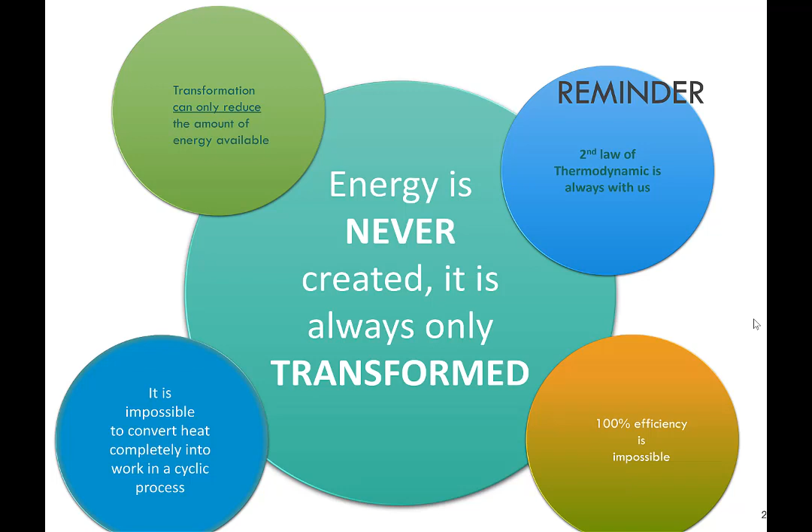100% efficiency is impossible, and in other words, it's impossible to convert heat completely into work in a cyclic process. You cannot do that forever. So keeping all these points in mind, we can move forward and talk about the resources. We'll get to know what type of resources we have access to.

And we'll probably provide a brief introduction to each one as we go. So forms of energy, we looked into this last week, and these are sort of forms which you expect and we are currently using and changing between one another. This was not covered last week: magnetic energy. Magnetic energy, in today's magnets, is really a storage. So you build a magnet, you store that energy in it, and then you can use it.

That brings us to trying to identify the types of resources available. And that brings us to two types, finite and renewable. So can you give some examples of finite? Fossil fuels, yeah, it is a good example of finite. How about renewable resources? So if we just try to look into these two, how they really differ. I know this probably already makes you think about quantity, and this is finite in quantity and this is renewable.

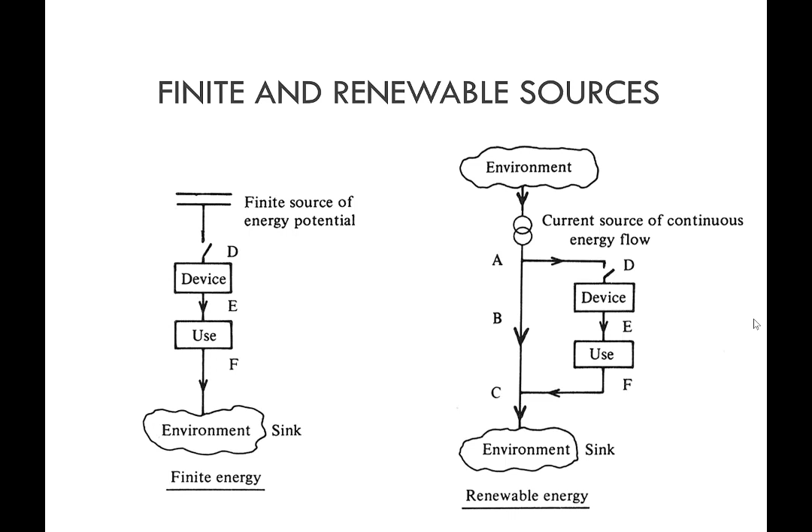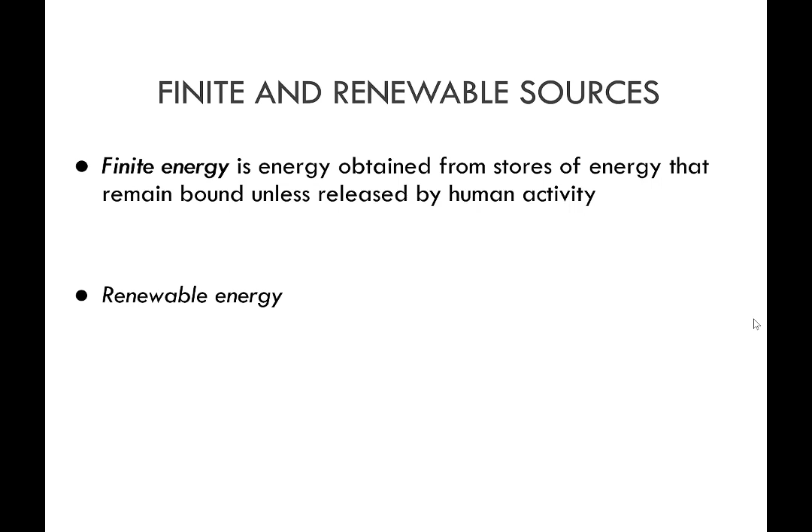Putting some definitions for these two. Finite energy is basically that energy which is obtained from stores of energy that remain bound unless released by human activity. Renewable, on the other hand, is obtained from naturally occurring currents. So these two things you need always to keep in mind when we talk finite or renewable: the stores for the finite, and the occurring currents for the renewables.

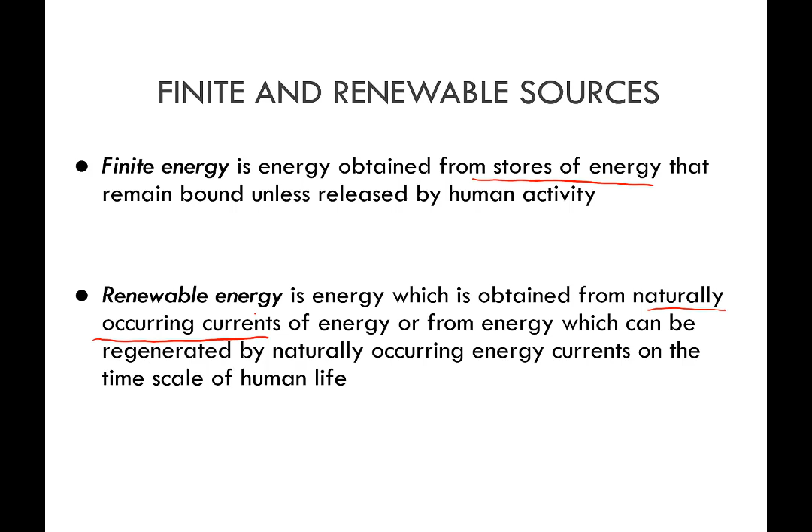Now, if we want to give examples for each one of these, we got the fuels, which you mentioned, and some examples for renewables as well: sunlight, wind, and earth heat, geothermal. Do you think there is anything missing from this list? Biofuel, or wood, or biomass. Where do you think it belongs to?

It is actually for both, something in the middle. It's something you can store and you can renew. But if you don't renew it, it will basically become finite, and you will harvest it, burn it, and that's it, it's over.

Doctor, yes please. What about hydrogen? Well, hydrogen, where is it coming from? Now, these sort of resources are already available for us, we are not making these. So the hydrogen which is there in the environment, which was basically released during the formation of Earth, it will fall in here. If it's something you are making with renewable technology, then that is different. You are using water, or getting hydrogen from somewhere else.

Now, if we just look into these and try to find the origin of all these resources, can you help me with that? Where do you think the origins came from? Sun, one of them, okay? And that is applied to sunlight and earth heat, which is the gradual cooling of Earth, basically, and wind. Come again? Wind. Well, if you think about wind, why do we have wind in the first place? Gravitational force, yes, but not for wind.

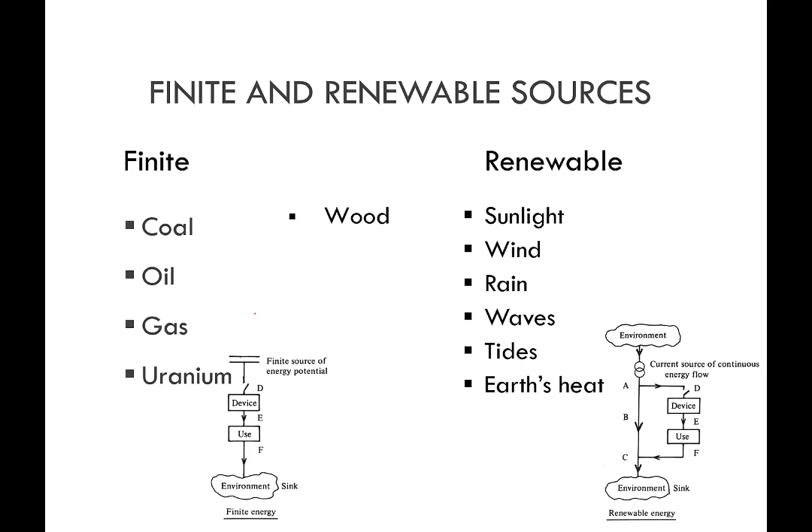Okay, so this brings us to the origin of resources, and we got only four. Energy released by the gradual cooling of Earth, and it's still being released as good currents which we can use. Energy stored during the formation of Earth, an example of that is uranium, for example. Energy provided by gravitational forces and the solar activity.

Now, if you look to this list, it doesn't really have what we have seen last week in all these figures with coal, gas, and oil, and everything increasing. So where do you think that fits? The fossil fuels, other than uranium. Where did they come from? It's millions of years of vegetation, which was due to the solar activity.

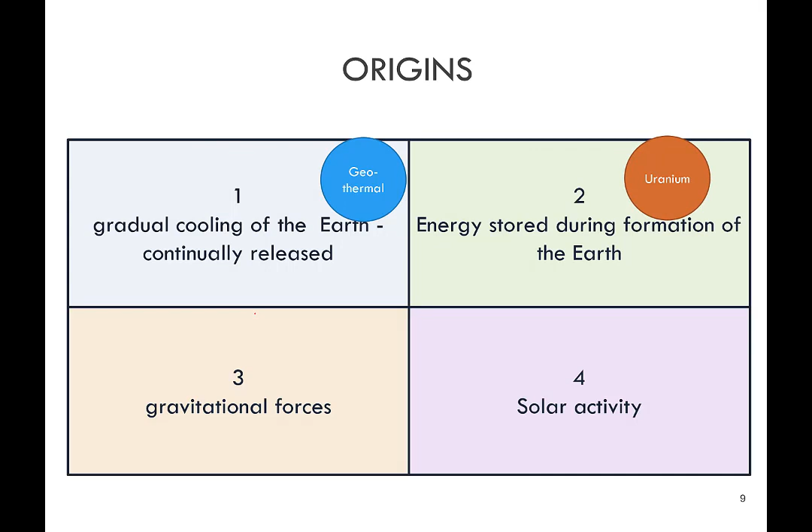So basically, almost all what we have now, other than of course the gradual cooling of Earth and gravitational forces, is lots of storage of solar energy on the planet. So oil, gas, all the coal, they are all basically from the sun. It's stored energy which we are now accessing on a daily basis. So let's try to divide these origins the same way, the four, and we'll just give an example to each one of them. And then you get a long list that goes with solar activity.

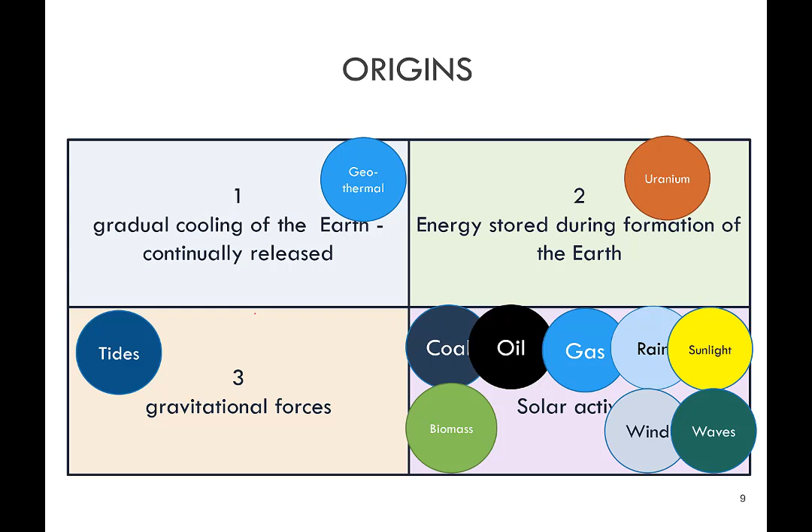Okay, so the ultimate resource is solar, and this all is being stored and we use it. Now let's try to put some numbers to all that.

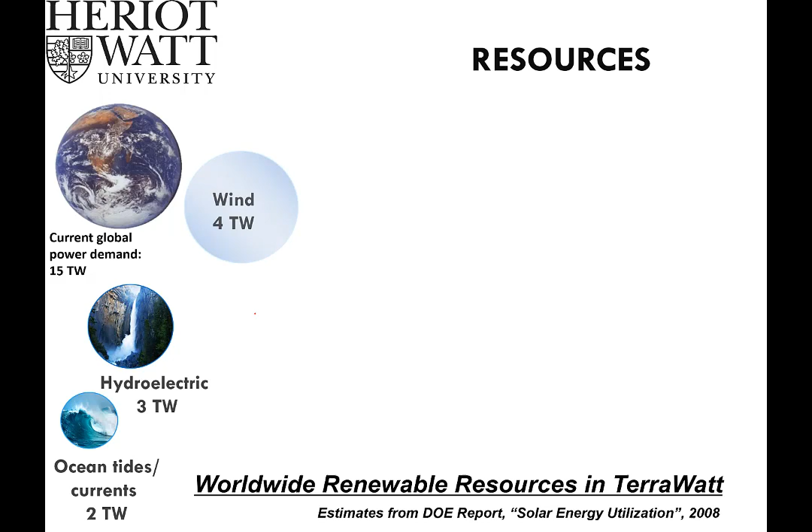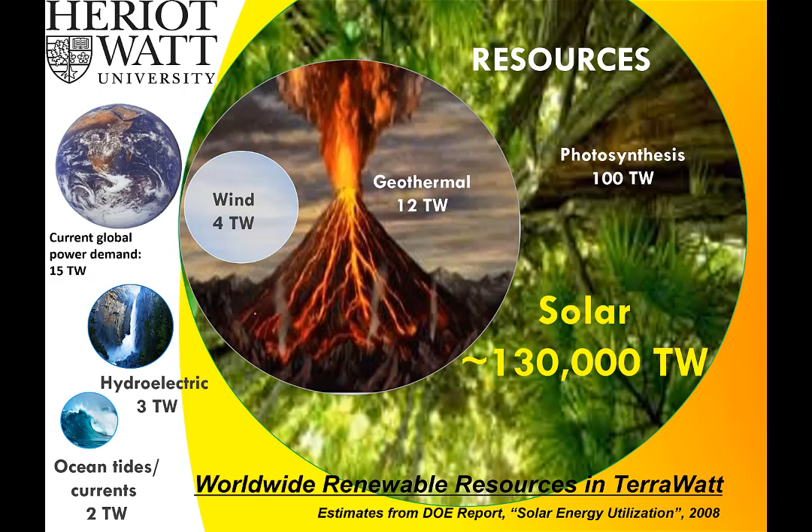Resources available in terawatts: the total required is about 15 terawatts. We get ocean tides about 2, hydroelectric about 3 terawatts, wind 4 terawatts, geothermal 12. If you add up all these together, other than solar, they barely add up to what the planet needs. This highlights how much solar energy we are getting and how much we can satisfy of the planet's requirements if we can tap into that solar energy.

So we get solar global radiation. This is on top of the atmosphere. Before the solar radiation enters the atmosphere, we get about 1,360 watts per meter square. Some reference books might give it as 1,363. So this is going to be a sort of golden number. We'll see how we'll convert that to expected solar radiation per area.

Now we get that on top of the atmosphere as long as the sun is shining. On the ground level, cloud coverage, angles, and all these come into place to estimate how much you get.

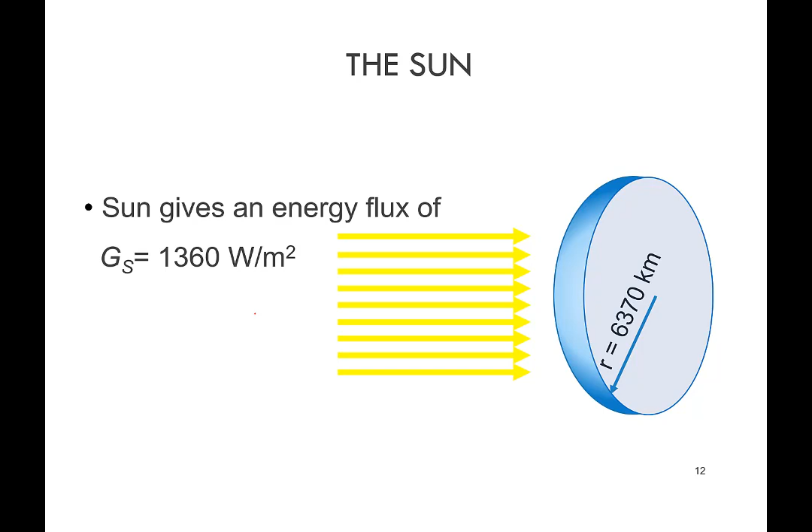So now if we want to know - this is per square meter by the way - how much we are getting to the surface, which area do you think we should take? A disk area, pi r squared, a sphere area, or half a sphere?

Half a sphere? Anybody, let's start with A. Anybody says A, disk? Okay, B, anyone, a sphere? Zero, which is good. Half a sphere, everybody else? Some people not raising their hand either way. Do you think there's another way to do it?

Anyway, so the correct answer is A, and I will tell you why. Because if you look into the sun, which is really far and really big, all this solar radiation looking from our small planet will look something like that. The sphere which you guys are talking about is here, but if you look at this energy, it's basically that disk area here. And then this will come and distribute to half of the sphere, and the rest will go and hit other objects. So are we cool with the disk area? Because we'll confuse you a bit next - we'll use half the sphere for something else. But I promise the disk is the correct answer.

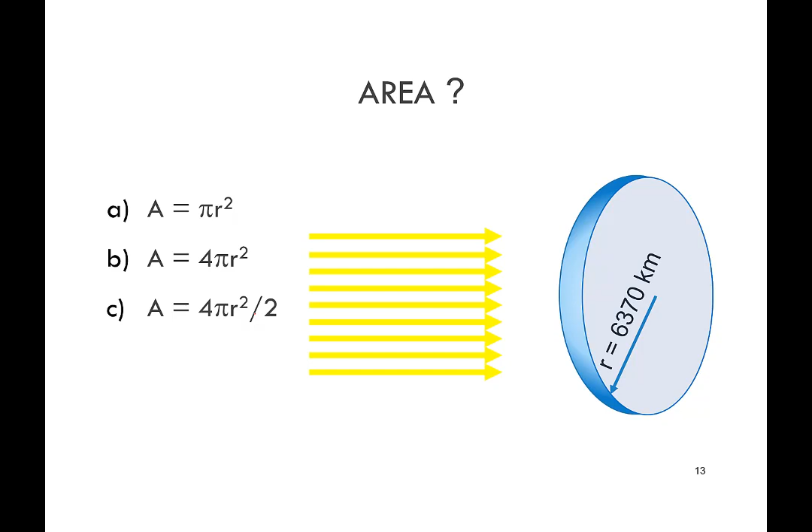So we are going to multiply that with the area. We need R, we have R - again, it's an estimated R, it's not a perfect disk or a perfect sphere, but we'll live with that, and we will use this radius in this case. That will get us to this figure, a total energy of 174 petawatts.

We have seen this last week as well, and we have also seen the 10,000 figure. So we get lots of energy from the sun, but we'll need to tap into it, use it, and it will satisfy a good amount of our energy requirements.

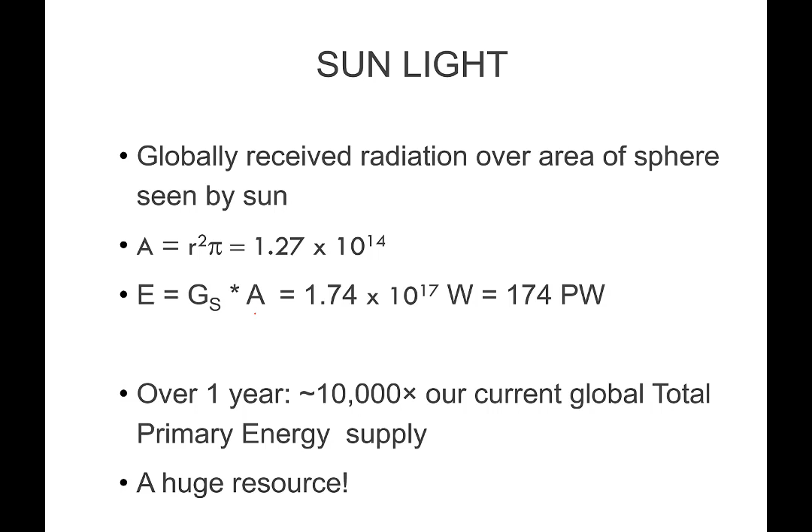Now, talking about radiation or light in general, we will see the spectrum of the solar radiation, and we know it has some other components other than the visible light. But most of it is actually in that visible light, plus a little bit of the UV and a little bit of the IR.

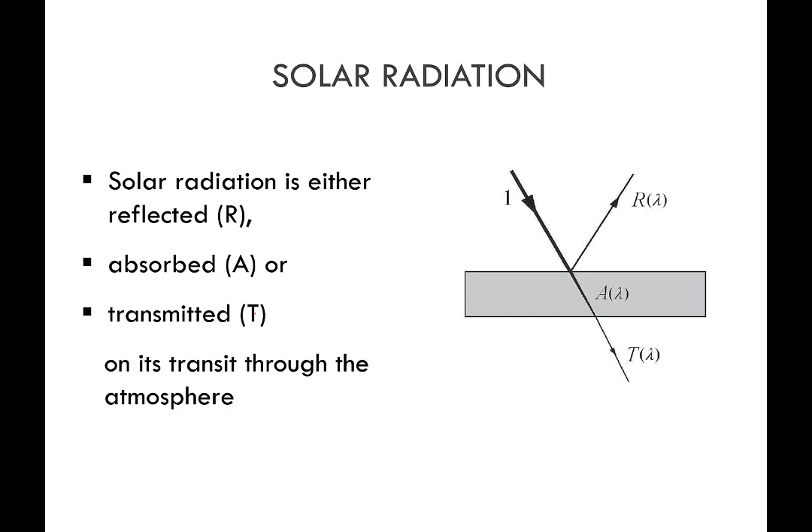So talking about light, physics 101, you will get the light either reflected, absorbed, or transmitted. You don't have any fourth component. So we will see how this will apply to our solar radiation.

The energy balance looks like that. So you get about 100% in, 70% direct reach to Earth, plus 7% scattered to Earth. We are interested in these - all your solar collectors are working on these, if they are at ground level. If you are building a solar collector up in orbit, then you will get the 100%, and then you don't need to worry about any sort of coverage. You don't need to worry about cleaning as well, unless an old satellite hits your setup.

Okay, so we get absorbed about here, and that is the ozone, and then there's the dust layer, the water, and so on. But what we are interested in really are these two figures, 70 plus 7. In general, moving from 100% of 1,360, we assume about 1,000 watts per meter square reaching the surface on a good day. And of course, that will be subject to angles, and we will see that.

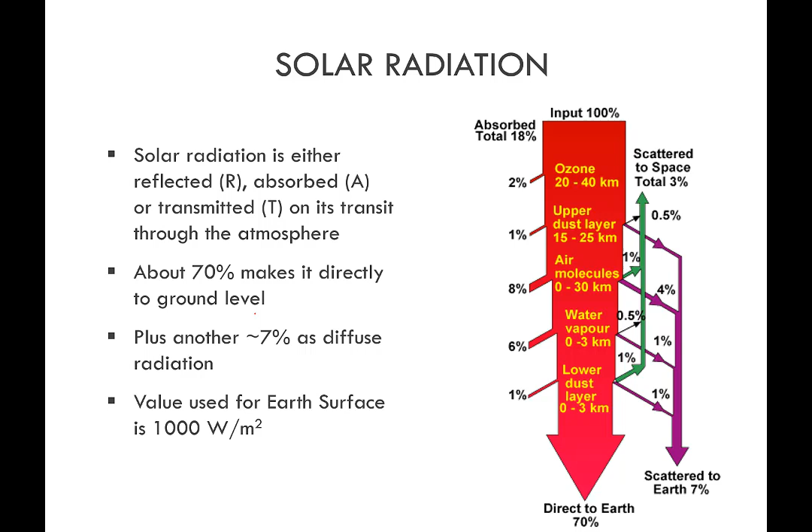So that brings us to another term, air mass. How many of you are familiar with air mass? No? Okay, so air mass basically is how much mass of air the light needs to go through to reach your solar collector, to hit the ground.

Air mass 0 here means there is no mass at all, and that's where the figure 1360 comes from. If you need to move in, you need to calculate the air mass. Air mass 1 is very easy, it's the shortest distance the light needs to travel through.

Air mass is a number which feeds into your solar energy calculations. It refers to how much air mass the light needs to pass through until it reaches your collector, measured based on the atmosphere the light needs to travel in. Outside the atmosphere, at this point, this is AM0, air mass 0 - there's no air, we haven't gotten into air yet. If you get to the shortest distance to hit your solar collector, then that is air mass 1. So zero and one, everybody clear on that? Then we can move to others.

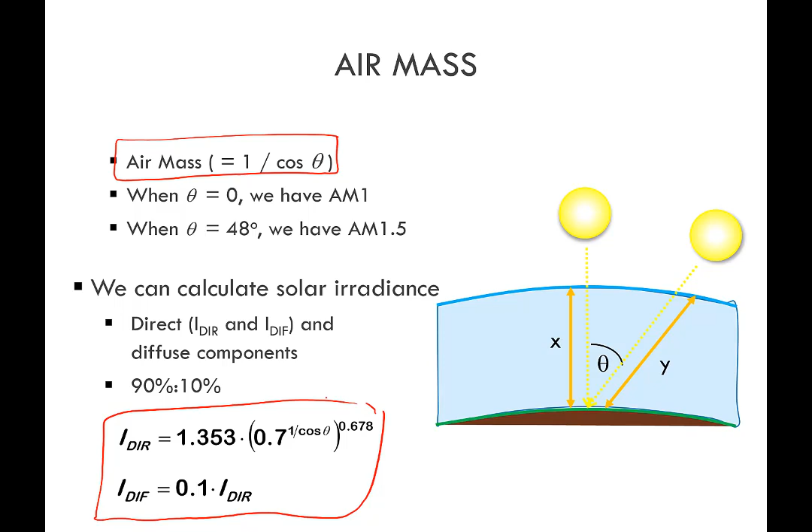Okay, some more on solar radiation. This is a typical spectrum of solar radiation at AM0. So if I want to put AM 1.5 on top of that, do you think it's going to be lower or higher? Lower, because there should be some losses.

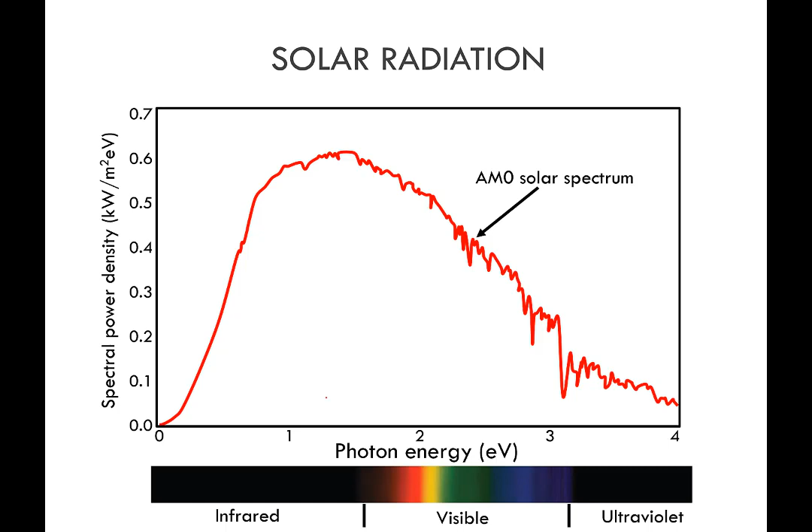Do you think it's going to be identical to this, just running below it, or will it have a different shape? Different shape - why? Because infrared, visible light and ultraviolet behave differently in the day. Ozone, because of the wavelengths - it gets lower because of the wavelength. Everywhere? So it will look the same? No, at the end of the day - infrared will be the longest wavelength, which has the least power.

Anyway, let's see it - it looks something like that, sort of expected lower in most of it, but then we've got these areas. This area means that photon energy at this level is totally blocked, or if we remember our physics basics, it should be absorbed somewhere, so it's not reaching AM 1.5. That's a place, let's say Seattle, for example, at 48 degrees - so in Seattle you get nothing when the photon energy is here, lots of absorption there. This is sort of expected, right? We thought it would be lower anyway due to dust and other things - UV, the ozone layer is helping us a lot. So what do you think is causing these spikes here?

Clouds. Why here? Because of the clouds, maybe over there. So why only these specific points? If the cloud should cover really all of it, it will be much smaller, right? If you think it's shading. Maybe.

And that's why the efficiency of solar panels is in the range of 20s for single junction. Recent years bring research of having two junctions. How about I have... I think I can do some good sketch, hopefully. It's not part of your class. So what's happening these days? You get basically a junction which can absorb red, let's say.

Now these colors are really just examples. It works at 20%, but it's built in a way that lets other wavelengths pass through. So you can put your second junction under, which absorbs green. And then I think the best you can do at the moment is 3 layers. So if you imagine 20% each, you can get up to 60 looking into 1 square meter. Of course, you don't get 20 from each after putting them on top of each other. 45 is typical for multi-junction nowadays in the market.

So this is a solution for the spectrum. If we can find another solution which will make these solar cells work on a wider spectrum, then we can increase the efficiency of solar cells by many folds. One more line: this is the black body radiation at the temperature of the sun, and you can see it goes really nice over the spectrum. That's where we got the theory of the sun's construction and how it emits energy and light.

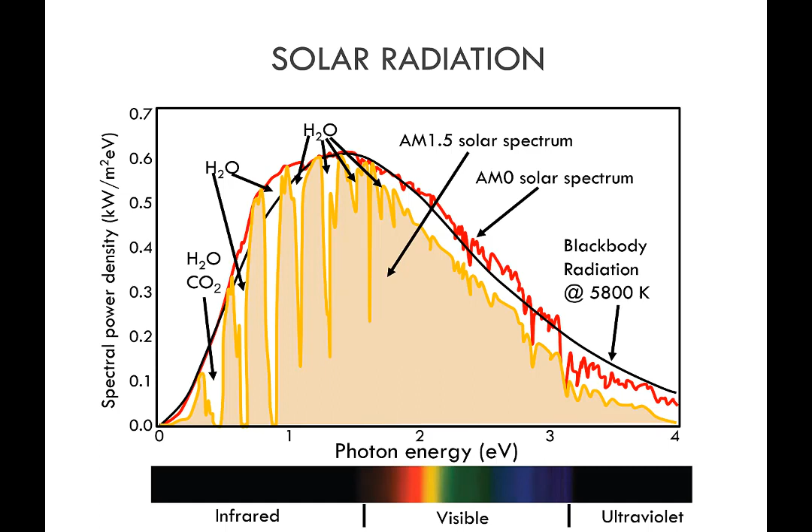So photovoltaic, which is what we are really after, has a typical efficiency of about 20. You get it out in the heat with the dust and the soiling effect, you get it much lower. You can do concentrated, but you need cooling. There are many ways to harvest that. This is again a typical figure, so it depends on material, temperature, and of course where you are fixing it.

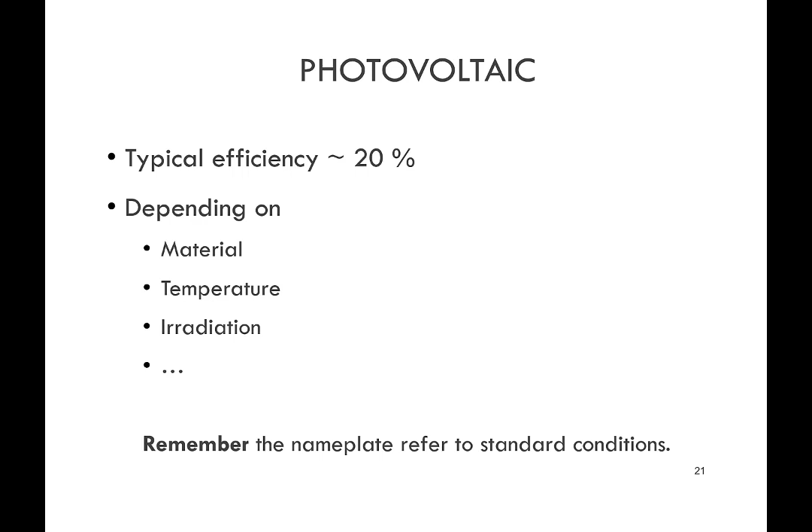Very important thing if you are going to be in this field: the nameplate always refers to standard condition. If it says 200 watts at standard test condition, that is 25C, unless it's mentioned something else, and 1000. The panel normally has a label on it for cell temperature, not ambient temperature. So it's equivalent, I guess, to 15 degrees Celsius ambient temperature, it really depends, but you need the cell to be that. And this is 1000 watts per meter square.

So if you get less than that, you get less. Temperature is, especially if we talk about the Gulf region, most of the cases more than 25, especially when you have good solar radiation. Maybe winter, and of course in the night. What about the air mass? Air mass is, I'm talking about the nameplate, some of them will also mention that: 1.5. But again, when you install it somewhere else, you need to consider the conversion from that.

Perfect. Anything on solar energy before we move forward? Anybody work in the solar energy field? Anything to add, some tips, tricks? Nothing? Good.

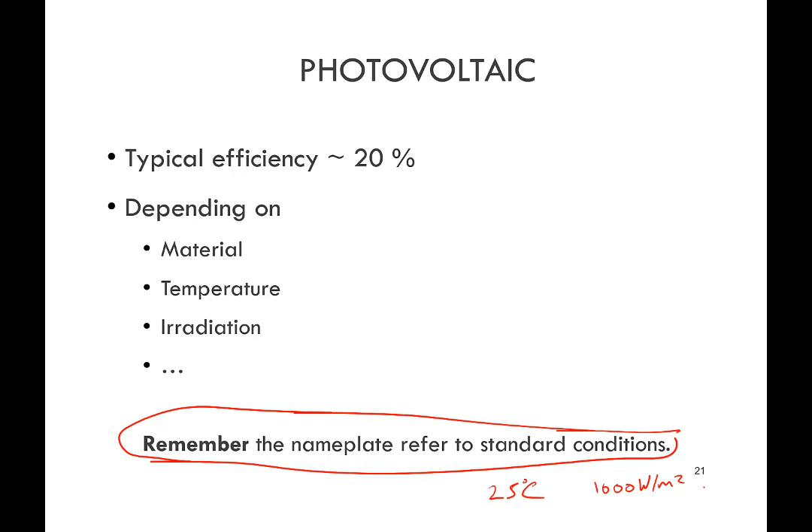That will take us to another resource related to our renewable resources, and later we'll come to fuels: wind energy. Now, wind energy, today I'm not going to really touch on it because you have a full lecture on fluid mechanics, and that will cover wind turbines as a basic. If you are a mechanical engineer, you should be really familiar with that. Other engineers must have seen it somewhere.

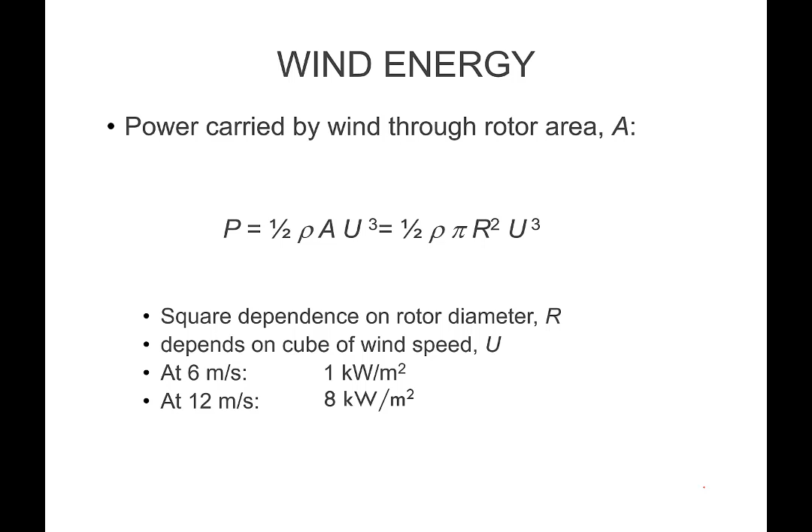Now, if we just want to draw this with respect to wind speed, we get a curve which looks like that. So, wind starts blowing, and then your energy will increase. It will double, triple, and then your energy will boom up. But any of you have seen a power curve from a wind turbine? Does it look like that? No, it doesn't look like that. Why?

Cut off. So what should I add to make it look like one? You mean it will stop? There should be a cut in, cut off, right? Cut in and cut off. Well, this is basically sort of cut in, there is nothing when the speed is low. But then you're mentioning cut off at high speed. How about the shape of it? Constant at a particular speed. Yes, exactly.

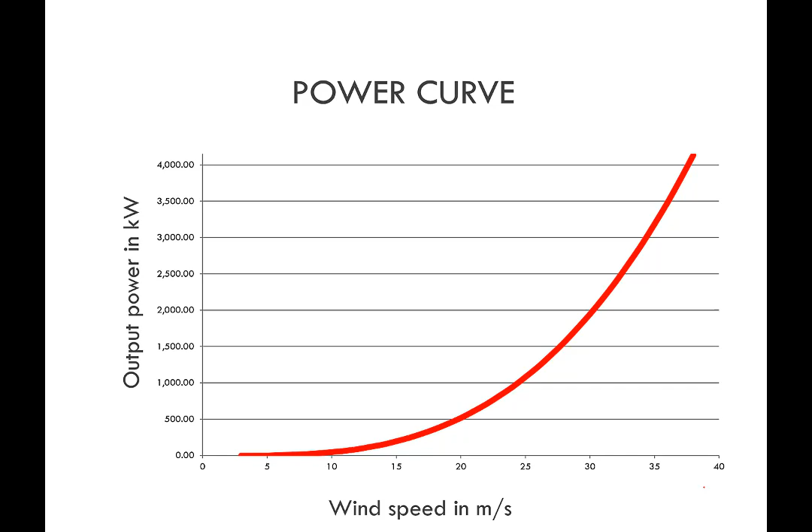So this doesn't happen in reality for one main reason, which is the generator. If you turn it faster, it doesn't matter anymore, it will reach its saturation for generating electricity. So you run it at rated speed, you get what you get. And that's why there is a rated speed at 10 or 12. If you run it faster, it doesn't really matter. Then the wind can blow even much faster, it will reach a dangerous level for your turbine, and you will decide to shut it down.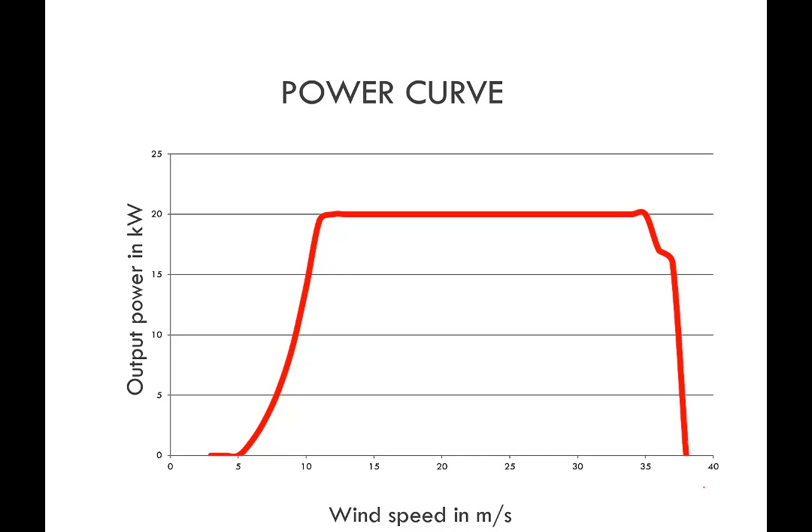Now the blades themselves, they move. So as the speed increases little by little, the blades will adjust their direction to reduce the speed and bring it to the rated speed. But it will reach a point where it cannot, then it will basically cut off. Which is sad, you have lots of wind, but you can't use it. Again, this is a field which is ongoing research. Years ago, the blades were not moving. Now we have moving blades, and we also have very intelligent systems to protect these wind turbines, because the investment is very high when you put a wind turbine in any farm.

So is there any specific reason that in Germany they are putting the wind turbines into the sea? Well, there are many good reasons for that. First of all, the wind flow, it's open space, so you can imagine the wind speed and flow, you can easily predict it, and it can continuously go. But is it again going to be more dangerous because of the sea, the high waves? Well, here your measures will come in, so it depends on your data from that specific area. You will decide which type of wind turbine and which sort of technology you put for protection. But what you need with wind is as much continuous wind as possible, so there is no curve change in the sea over time. And technically, you calculate the power the same way. In the sea, you have lots of area, so you don't want to worry about land.

You get lots of wind in open land, so you don't need to worry about buildings blocking it. You can also develop the country - what is now desert or mountains may in 20, 30, 50 years become built-up area. People often don't like wind turbines for various reasons, especially in Europe where there's lots of opposition. Offshore in the sea, at least they don't see them.

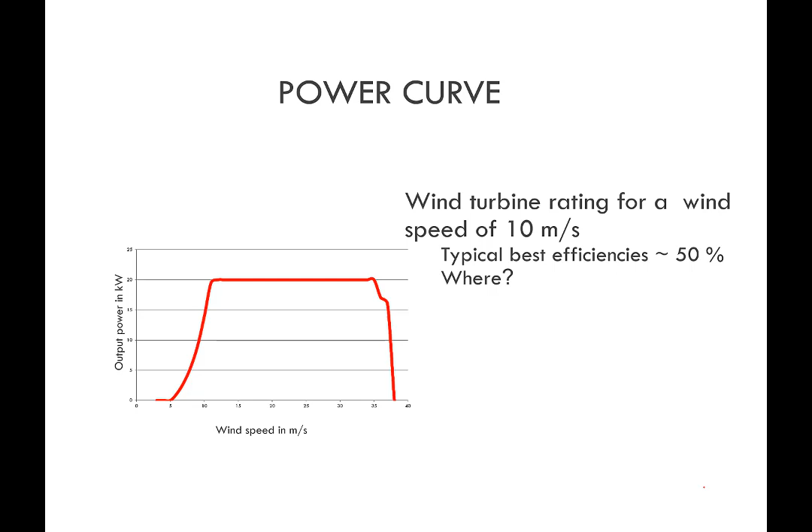Wind turbine rating for a wind speed of 10 meters per second - typical efficiency is 50%. When we talk about wind turbines, where is this 50% on the graph? The rated RPM - at the rated RPM, just when it started, this is the best efficiency. Why? Because as you move further, you're getting more energy but the same output, so your efficiency is really dropping as you go. So it's really at the rated point, and that is the best point to operate.

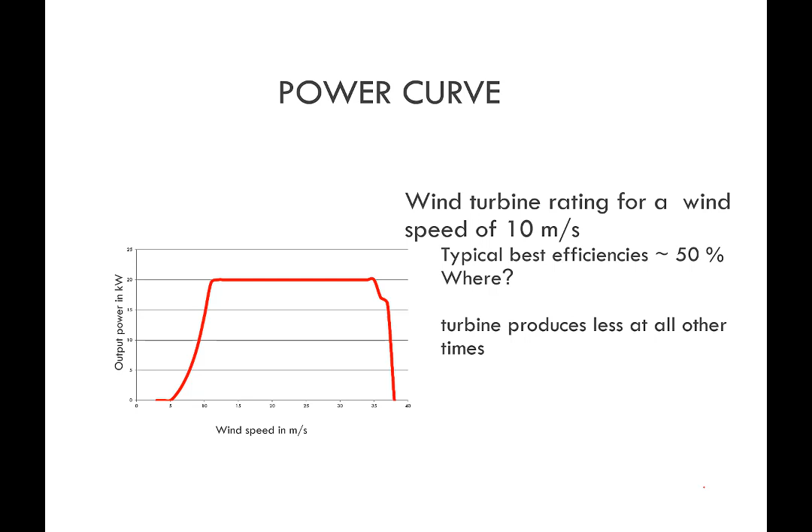The turbine produces less at all other times. Now, when we talk about wind energy, there are always limits - Betz's limit in this case is the maximum you can achieve, which is 60%. If you make an ideal wind turbine, you get 60% energy harvesting out of it. Similarly, in thermodynamics there's the Carnot cycle - you cannot exceed that, similar to what we've seen in this graph. There's also a rated RPM for the generator; it doesn't matter what you do after that. So there are always limits, and these are things to keep in mind for wind energy.

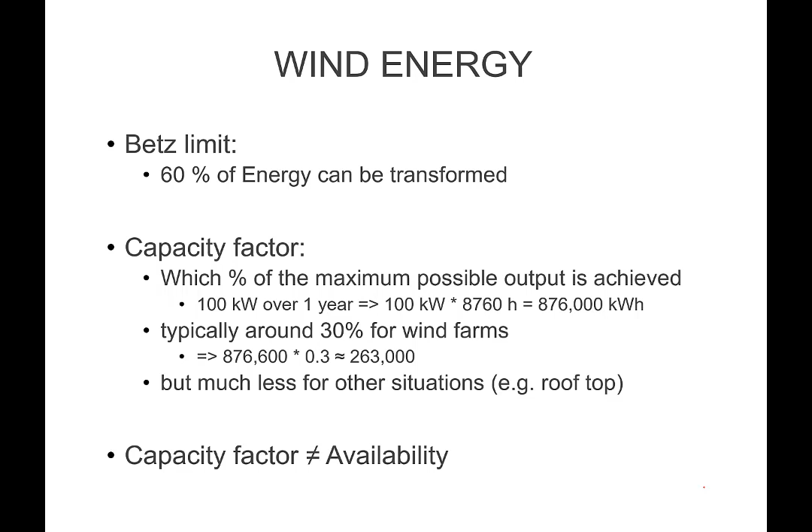Capacity factor is something you've seen last week, and then that will let us move forward.

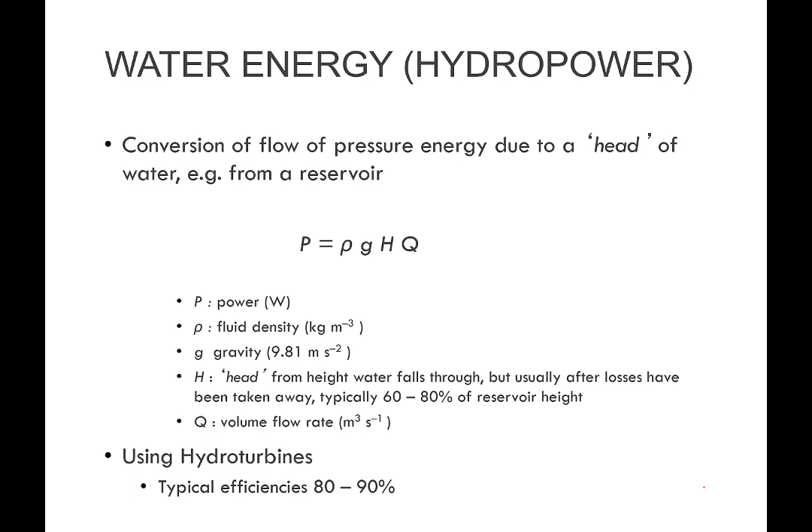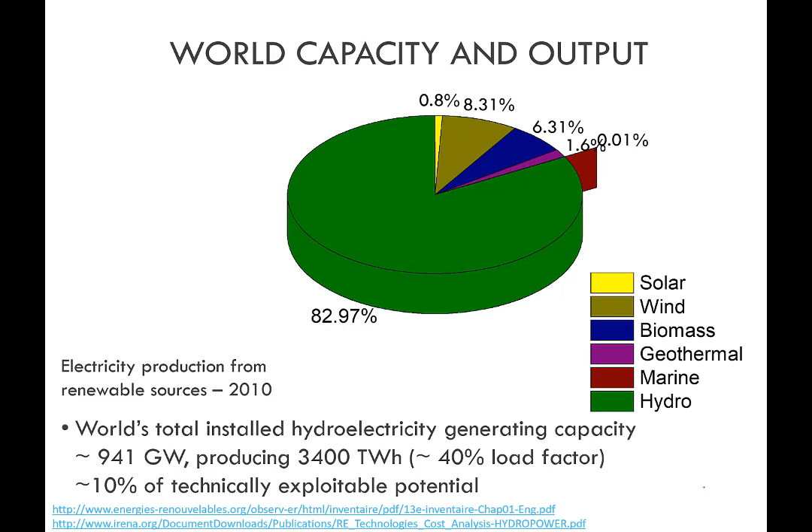So anything on renewables? No? Yes, please - regarding geothermal. I heard about some projects where, for example, if you drill to a certain depth and it heats up the water, you can use it. Where - in Dubai or UAE, or somewhere else in general?

If you want to harvest or work with geothermal, it can work both ways. For example, in Dubai and UAE, if you just get to the water level, the water is normally at a fixed temperature, so you can use it to dissipate heat and use a heat pump to cool things. But if you want lots of heat, that's something you cannot do everywhere - there are certain places like Iceland, for example, where that's possible.

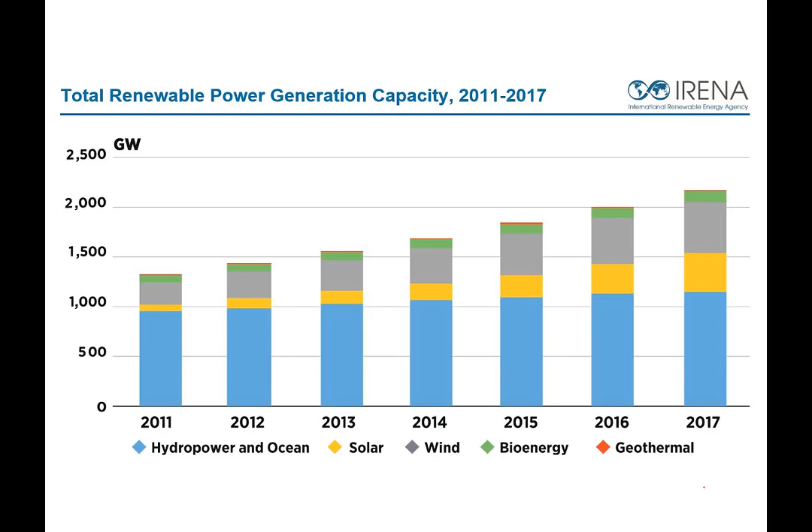In order to link the numbers together when it comes to reserve, production and so on, specifically about fossil fuels, there's a basic model presented in the textbook - Hubbert's model of reserve. Here I'll cover some basics and show you how it looks, then you can check it out. I have to mention there are some statistical equations mentioned that we don't really use a lot.

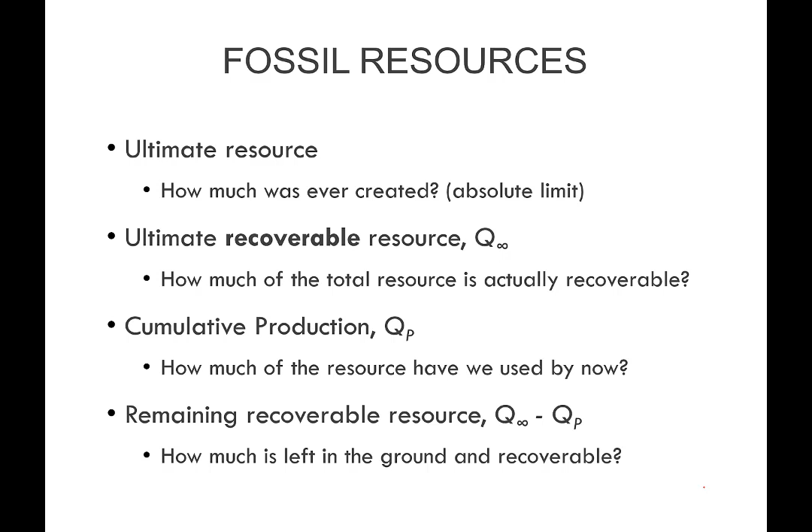Now what we're interested in is really to see how the reserve looks after doing these calculations, then look into the production rate. The production rate will basically decide when you will finish that resource. We'll say the oil will finish in this many years, the gas will finish in this many years, and so on. If you divide them, you get the time scale - how many years are left of each resource.

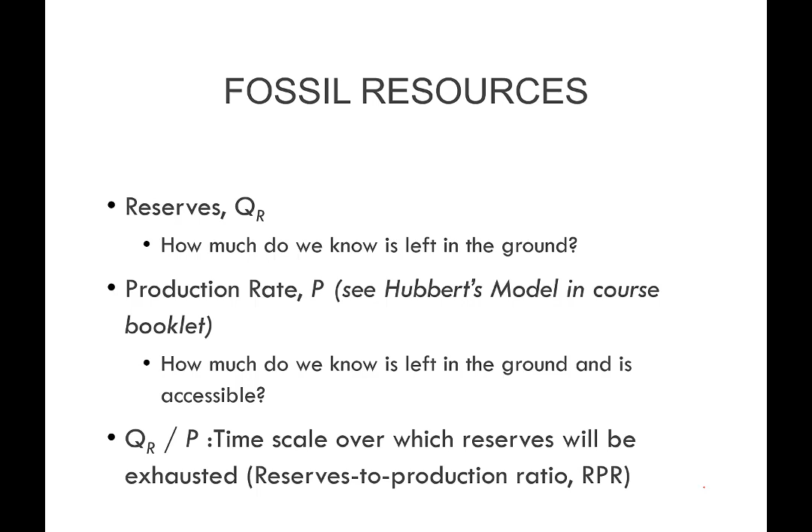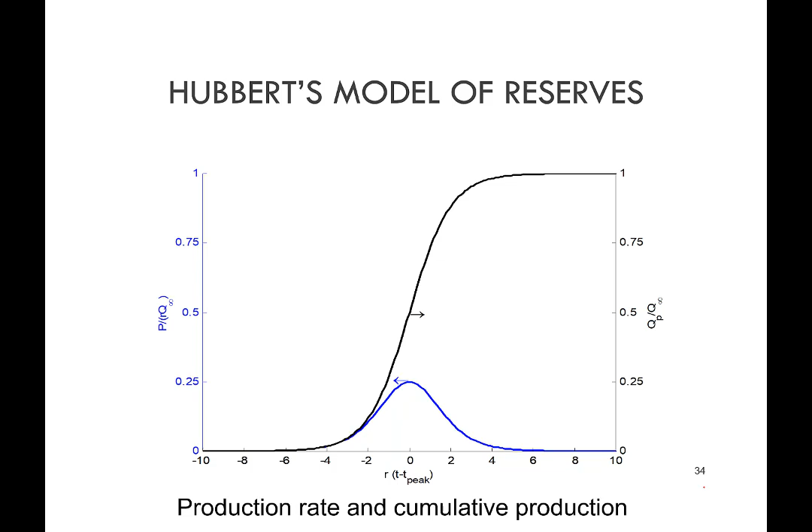Basically, this model will tell us when we're going to run out of these resources. This is basically a statistical model. Sometimes you can use it to estimate, but it's more to represent a specific case of production. But you can use it as a model of production and reserves, mainly. Okay, if you check textbooks, I think one or two, chapter two, you will get more information about that.

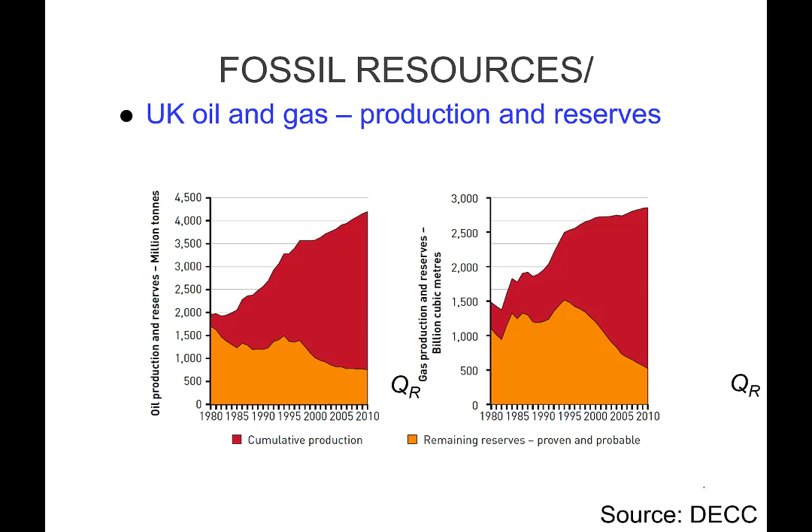Oh, what is that? One second. No, we'll check it out later. It's coming next. So some notes here to keep.

Reserves is not what's there, because there is no point if you know there is something there but you cannot access it. Is it too far, too complicated, too expensive to access it? You cannot consider that as reserve. Reserve is what you basically can bring and can sell in today's market, so you can use it as a commodity.

Just to add one thing, because most of the cases, whenever companies or investors talk, there are two types of reserves. One is, for example for oil, there is initial oil in place, which represents like 100% of the oil which is estimated, and then there is recoverable. Of course it's not equal - recoverable means almost a third of the initial oil in place. And also proven reserves, there are categories like A, B, C plus. We are not going to go into that detail, but it's really important to know that the oil in place, or whatever resource in place, is not what you can get. But the good news is, if it's in place, maybe in 10 or 20 years' time you will have the technology to access it - so it's always good news, even if you're not able to access it now. And this is what you were talking about, original oil in place.

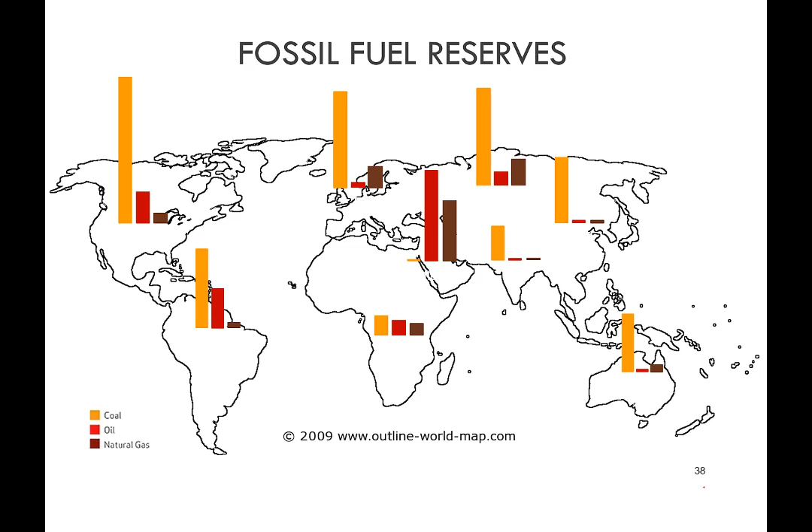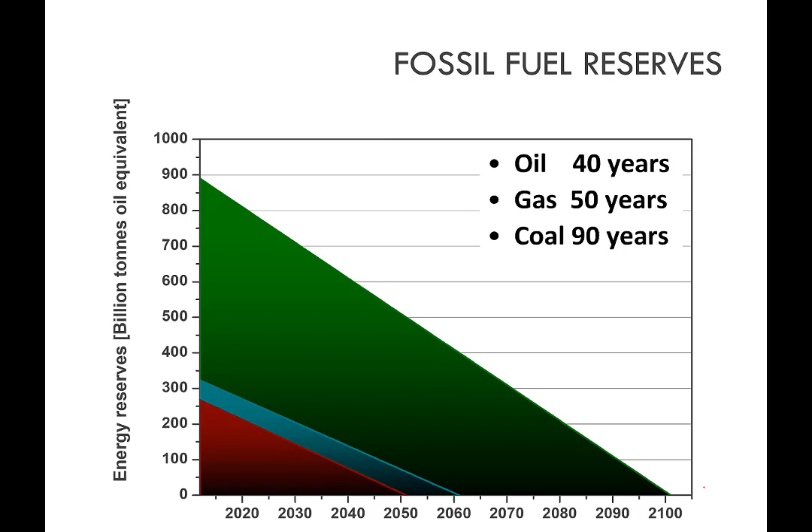Now I'm not saying this is an exam question, but I'm not saying it's not. It's a previous exam question actually. For example, in the last part, the non-numerical part, a question will ask what are the expectations for the fuels, how much we have. So getting familiar with some of these figures, even if it's a worst case scenario, is good. If it's not worst case, another scenario, if you know more about it, it will always be good. So moving forward, now we have seen all these.

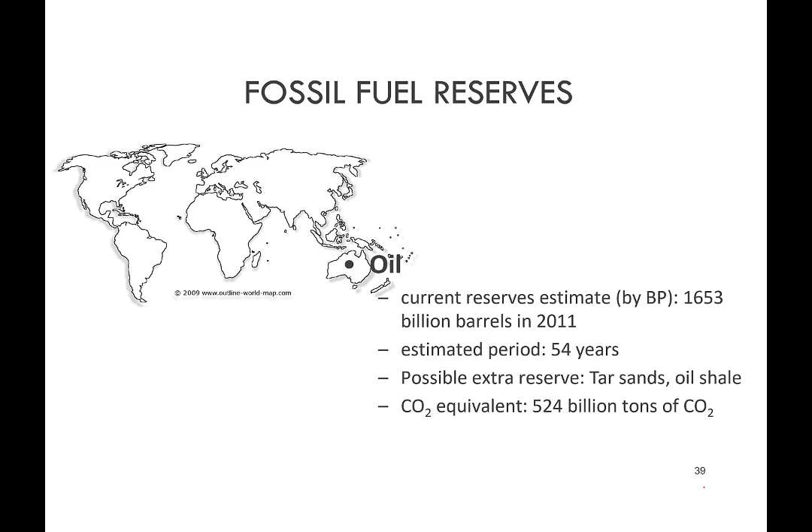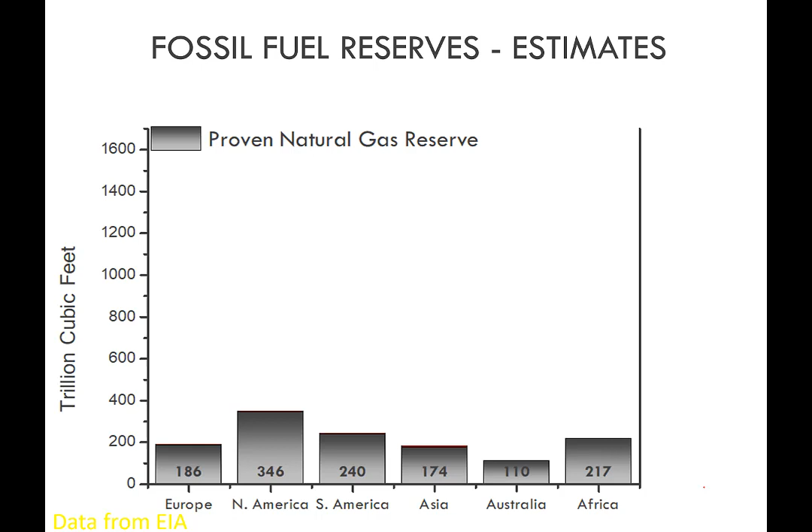Similar thing here into gas. So this is natural gas reserve around the globe. What's missing from this? Anything missing? Shale gas. So you can see how the picture looks before and after the shale gas. So this brings us to last week when we mentioned, when we manage to access a new resource, it might fully change the picture, the prices, and even how attractive research in specific areas is.

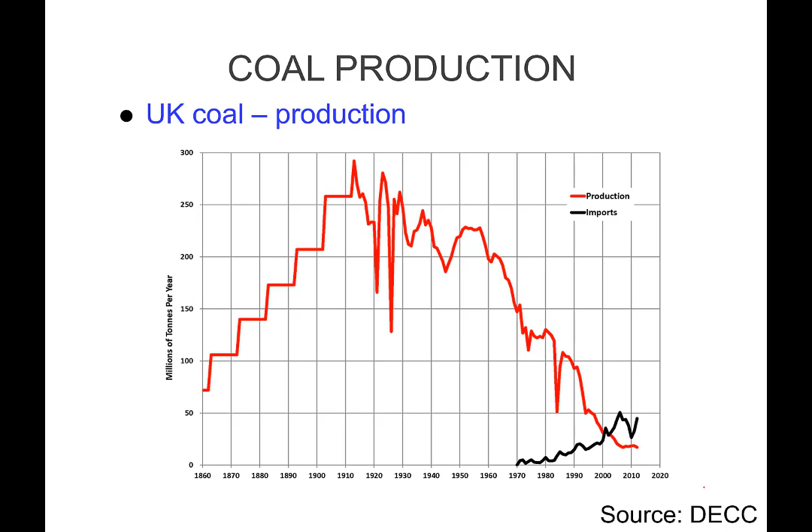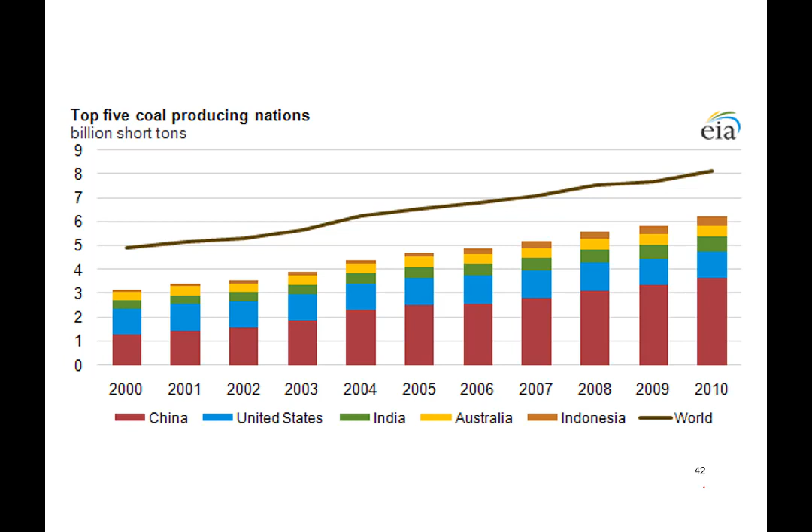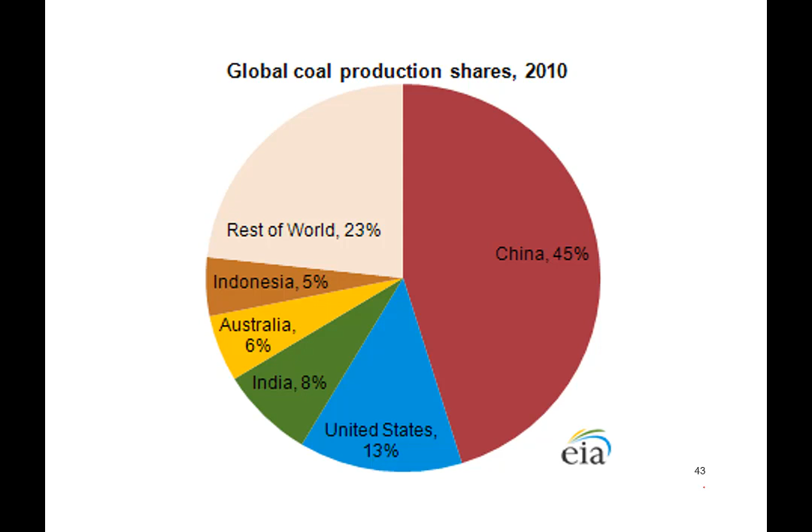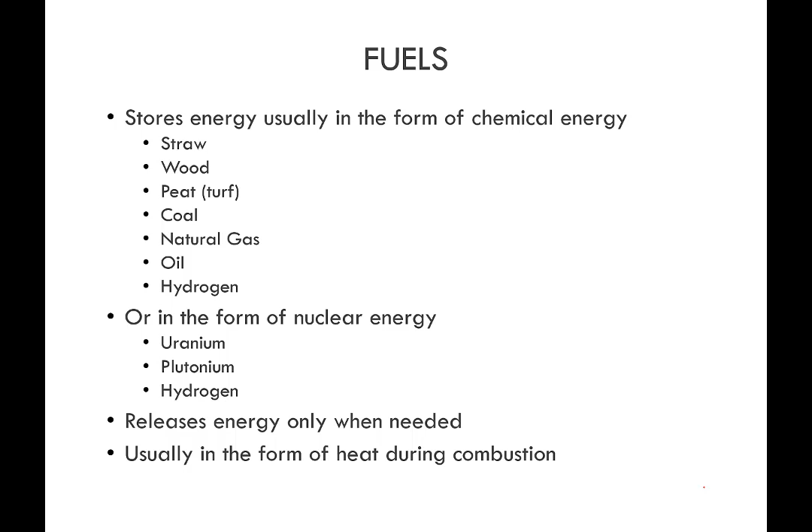That will bring us really to fuels now, and fuels are a store of energy, and normally a chemical energy. So we got here a long list which we are familiar with. Nuclear energy in here, uranium is mostly used, but then there is also research on thorium and other ways. What's good about fuel, they release energy only when needed. So we can store them, transport them, leave them in a place until we need them. And normally you get heat out of them from combustion. You will be talking a lot about combustion and calculating CO2 emissions, and we will see next where all these emissions come from. So we'll also try to list some of these examples. We'll talk about coal, biomass, and maybe hydrocarbons as well, which is gas and oil.

Biomass, it's really wide range - wood, ash, straw, and many things. We'll see examples of them. They represent about 10 to 20% of the world's energy. We have used them for thousands of years for cooking, heating, and also for other uses.

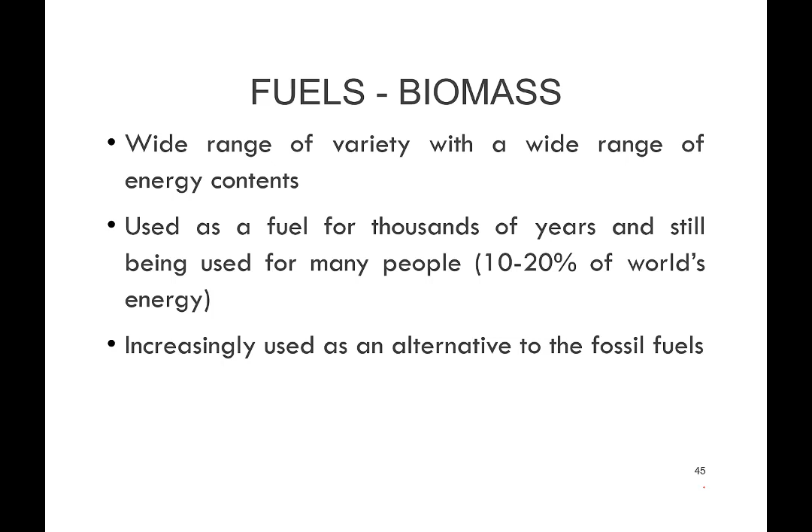Nowadays, biomass fuels are being increasingly used as an alternative resource, especially renewable biomass. We'll also talk a bit about its emissions.

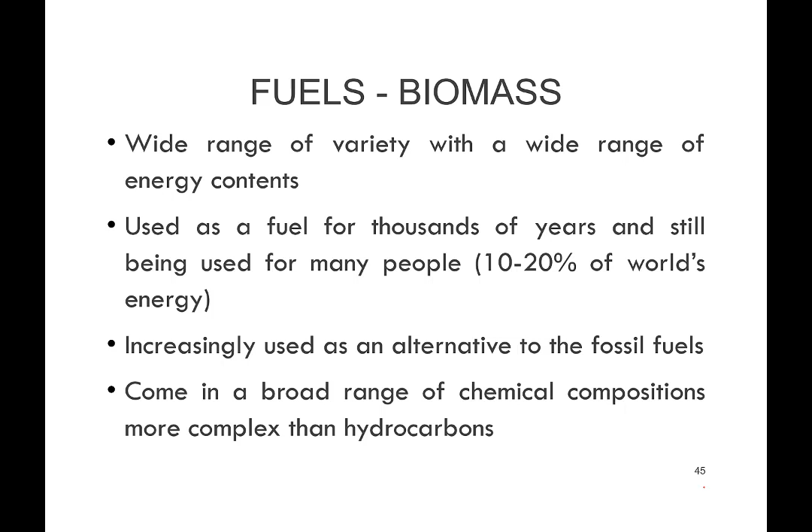The tricky part here is that biomass comes in a broad range of chemical compositions, more complex than just hydrocarbons or coal in the case of carbons. It also comes with some humidity levels, and sometimes it comes dirty, which you'll need to deal with.

Now, looking into the chemistry for them, this is the general term, but in our course, we are going to consider all biomass to be CH2O. So you don't need to worry about other types of biomass.

When we talk combustion, CO2 is a must. So it's always O2, CO2, then we can get H2O if there is H in the first place. This will be covered in combustion in more detail, where you will need to calculate and balance all these equations, calculate CO2 emissions and energy content.

Why we have this here is to get you started, and to think about whether the biofuel or biomass fuel is renewable and carbon friendly. What do you think? Is it?

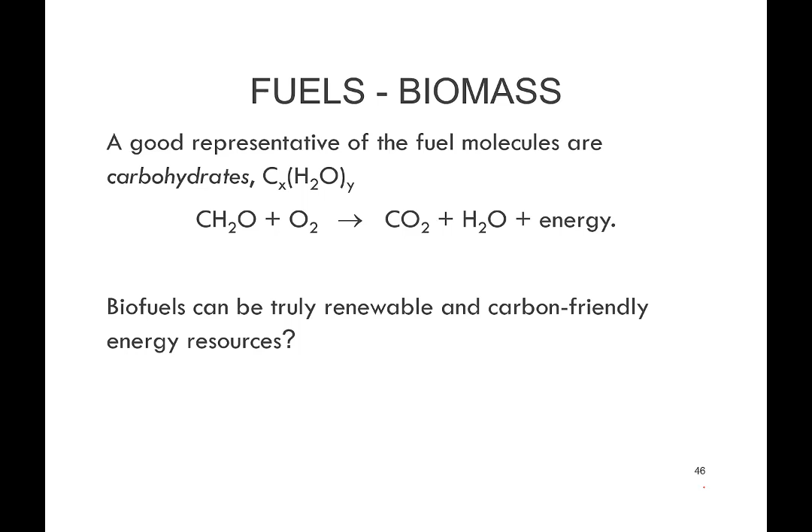Yes, I think it's renewable, but carbon free, no. Why not? Because it produces CO2? This is one of the reasons. But the plant which is used will also consume CO2. Yeah, but then you are using the area. Yes, but it's basically here - these plants, if we just take simple wood as biomass, it's basically a store of solar energy from photosynthesis, and it uses CO2 in there. So CO2, you add water, and you add energy, which is solar energy, you get a tree. You chop it down, you go camping on the weekends, and enjoy the fire.

But this is not the full picture. Looking into this, you can say, yes, it's probably net zero carbon - what comes in comes out - but we know there is always efficiency and losses. Not all the wood you grow is going to burn. There are losses in production, losses in transportation, losses even during burning. So normally it's certainly friendly, but it's not zero, because you are cycling.

And also this part: nowadays, it's not simply that you plant the tree, forget about it, and come back after 50 years to have trees ready to burn in your biomass burning station. It's not that easy. You will need transportation, which emits CO2. You need to take care of all the farming processes, which emit CO2. And this will all be taken into consideration when you do your CO2 emissions calculations.

So typical questions will tell you: we get this much wood, 20% is regrown, 10% is lost, do your CO2 emissions or savings.

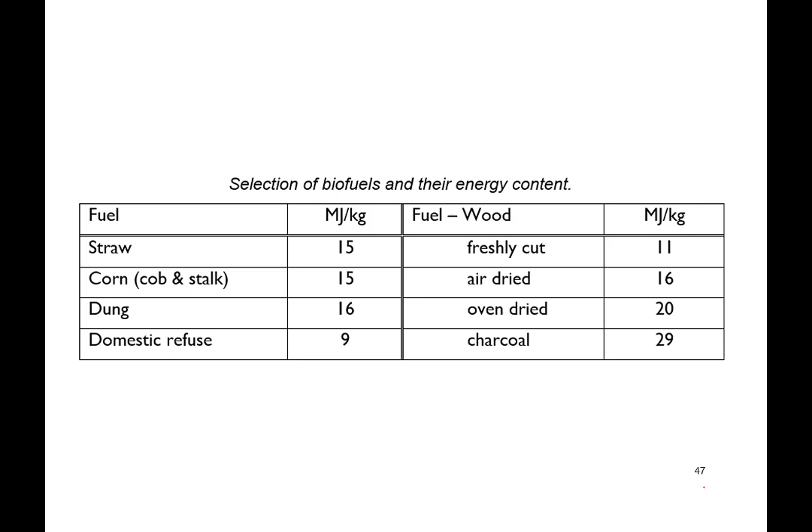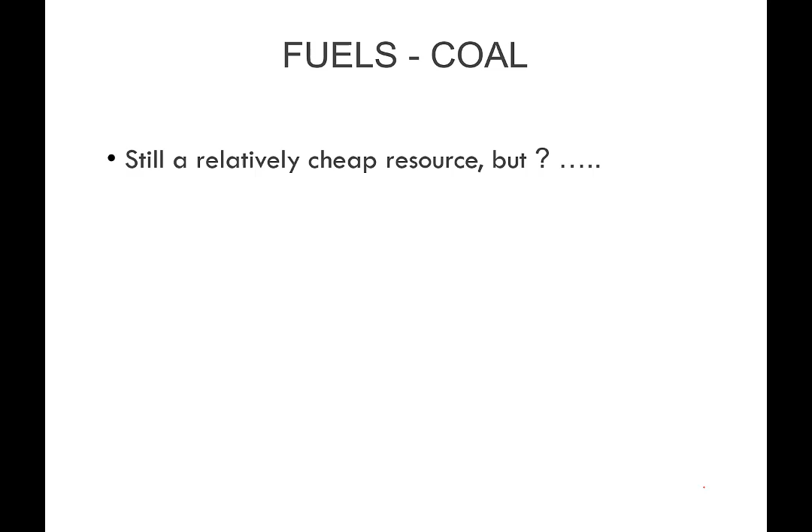That takes us to coal. It's still relatively cheap, there's lots around the world, and it's the most available one compared to oil and gas. But it's dirty - very dirty to transport, to mine, to deal with, and to deal with its emissions.

It's complex. It depends where it's coming from, millions of years of pressure and heat, what sort of composition it is in, and so on. What we care about is the carbon. So whenever we talk about coal, you'll be given a carbon content - how much of that coal is carbon. And it's not 100%: 70%, 60%, 80%, and that is what's going to be useful as a fuel for you.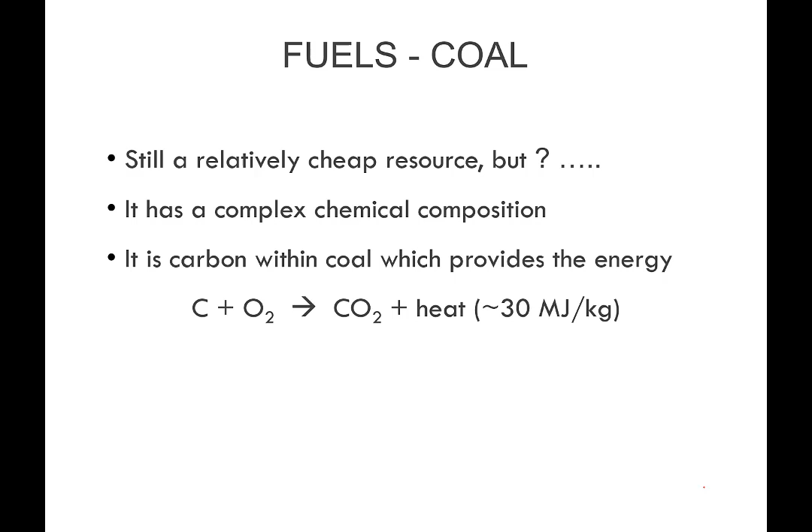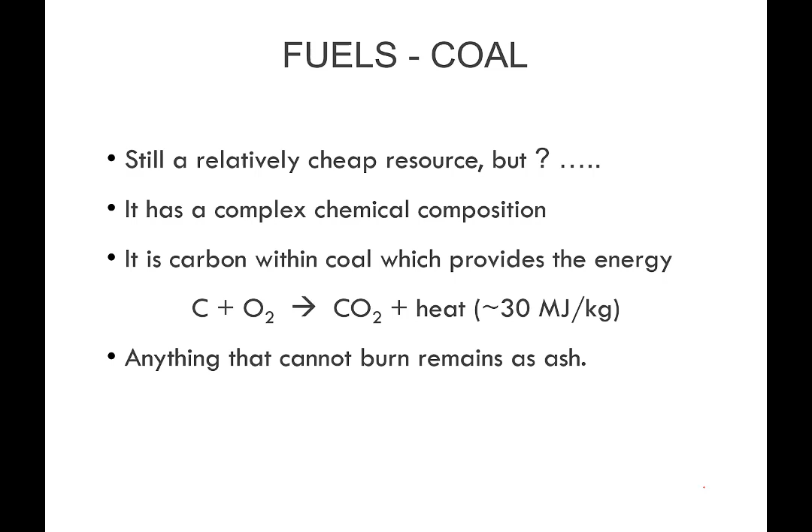A typical equation looks like that: C plus O2 gives CO2. Nowadays, when they say clean coal, you basically do capture and storage of this CO2, and then that means it's clean coal. But the coal coming in is still as dirty as hell. Anything that cannot burn will stay as ash, and you need to deal with it in different ways.

Here I've got some examples for you. The wood part is really for reference, but the most famous ones are lignite and anthracite, and you can see 30 megajoule there compared to wood at 20. Fixed carbon, which is the carbon content, is here, and then you also get moisture, ash, and so on. This will be useful to calculate your waste later - so if you burn 1 ton of anthracite, you will get 150 kg of ash, and so on.

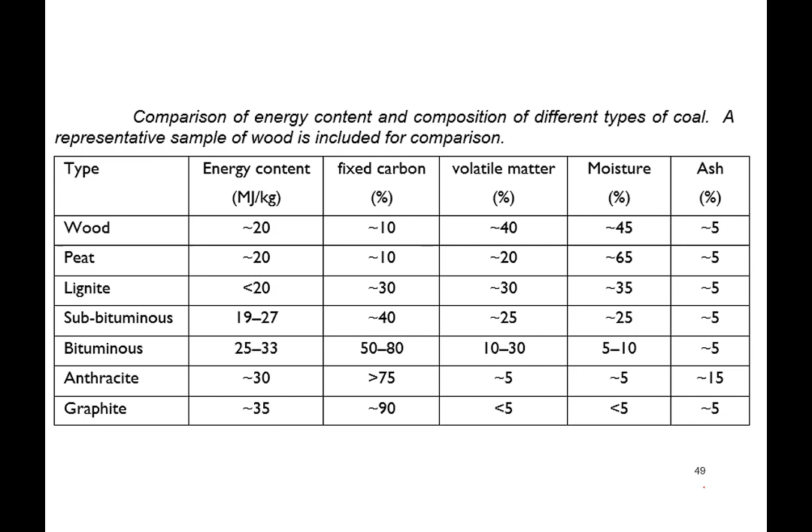So that will bring us to what's left on the list of fuels? Nuclear, right after the next one. Hydrocarbons will apply to our petroleum products and gas. They are hydrocarbons because basically you have a carbon and then hydrogen attached to it.

What do you see? How does the number of hydrogen relate to the number of carbon? It's always double, plus 2, one at the start, one at the end. This is something you will find in the textbook. You need to keep it in mind. Always the number of H is double plus 2.

Yes, exactly. I don't have it in the slides, but yes, CnH2n plus 2. It's there in the book, will be covered in more details with Dr. Amber. I removed them from these slides just to make this go a bit faster on fuels and avoid repeating them again in combustion.

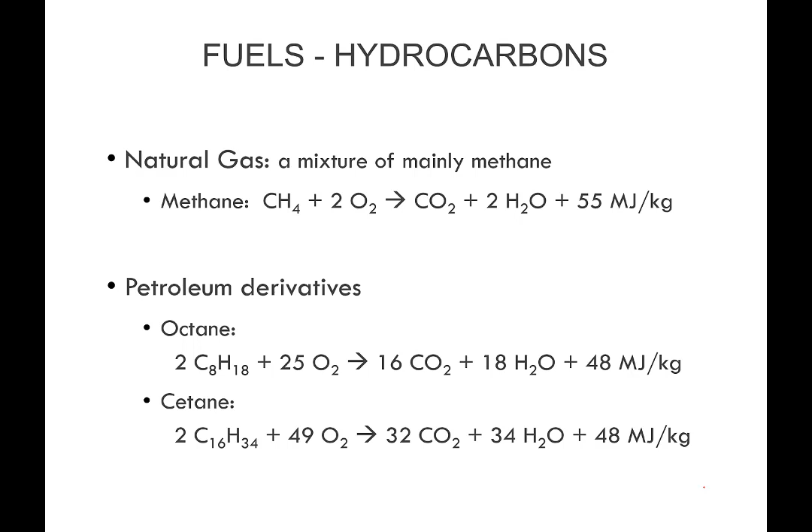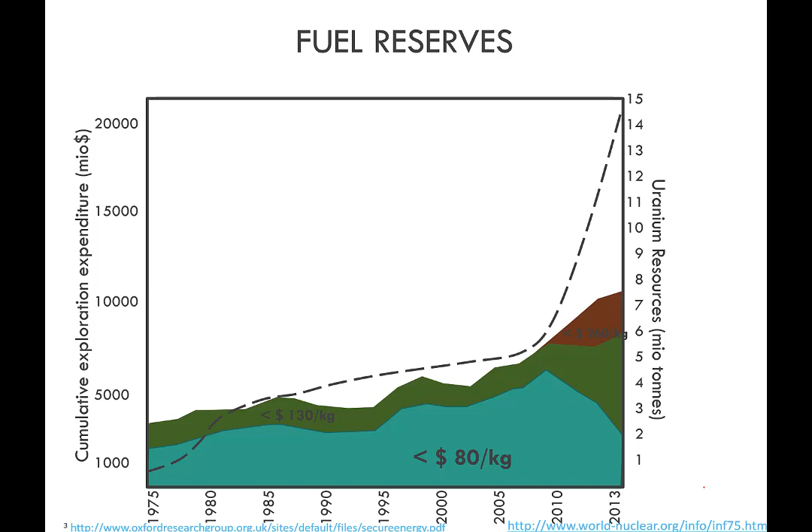Now here we'll talk more about nuclear fuels for a couple of slides. When it comes to uranium or nuclear fuels - because there is research now on thorium as well, or maybe plutonium and so on - the price really depends on how much is there, the quality of basically the ore you get. The quality will vary the price, and will vary how much CO2 emissions you are putting into mining, transportation, and processing until you get the fuel ready for a nuclear plant.

So this is very important to consider. Nuclear power is emission-free in generating heat from the station itself. But for the fuel, that's called the life cycle - getting it from the mine to the station, using it, and dealing with the waste later - which will add lots of CO2 emissions. Of course, won't compare to other sources, especially if you make a good, big cycle. If you use all electric vehicles for transportation, but then power them with electricity generated from nuclear plants, you are cutting your transportation emissions.

But then you are getting emissions from building the batteries and these cars and so on. So it's really the life cycle which you need to consider when we talk about emissions. But certainly in operation it's clean. Some people think it's dangerous, maybe not, I don't know.

What's your thoughts? Are you with or against nuclear? Why?

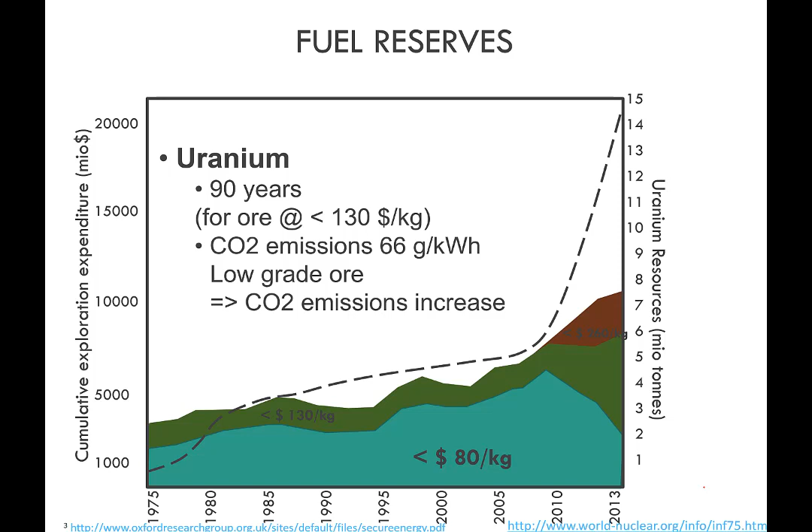Now here's some more information on nuclear fuels. Uranium has several naturally occurring radioactive isotopes. This next one will hopefully show us the heat content. Remember when we saw oil, gas, or coal, we were in the range of 20 to 50 megajoules per kg—now you can imagine what we can get from this. Much smaller amounts of fuel get us way more power. That's why it was attractive back when all these plants started to be built. Now, if you work further with that, you can enhance it better—this is the enriched uranium in this case.

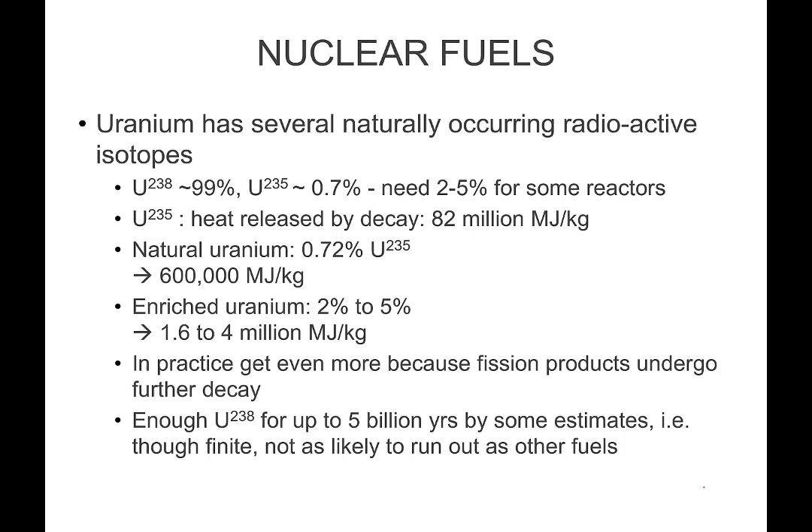But why I brought it back today is just to cover the point about decommissioning. So how long do you think decommissioning of this will take? It stopped operating last year. How long do you think it will take to decommission it, to get the land back, and then make a new development, if it's a station or something else?

I think it's more than 50 years. Yeah, anybody else? No, just decommissioning, since you close the doors until you have it as empty land. Maybe 8 to 10 years. 8 to 10 years, even more than that.

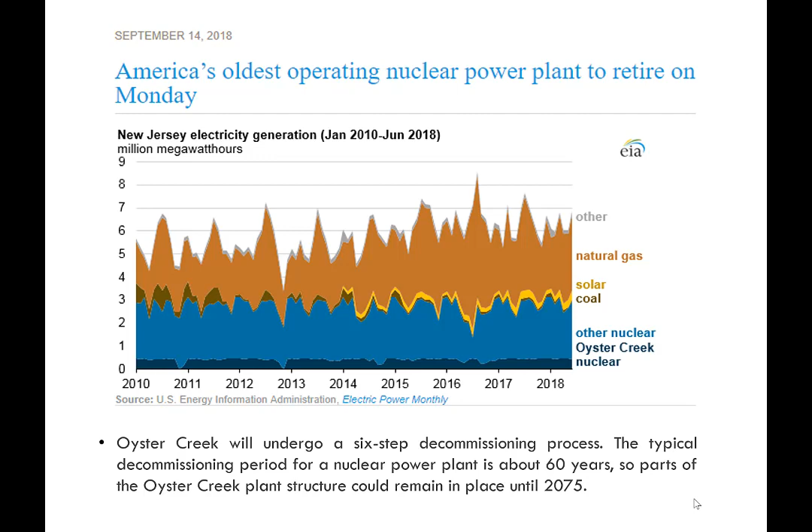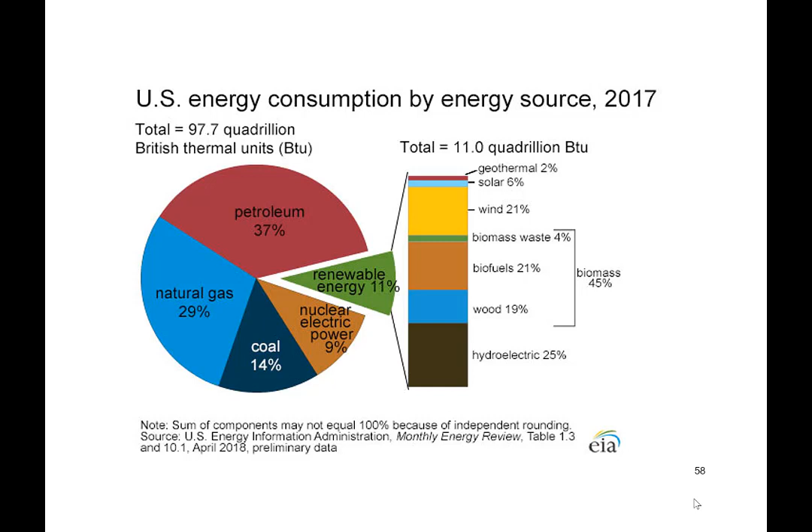But looking at the world's energy consumption, biofuels are increasing, and a good example of where this increase comes from is here, how biofuel, biomass waste and wood is contributing to the energy. So all these actually work like puzzle pieces, you put them together and get a better understanding of what's happening in the world.

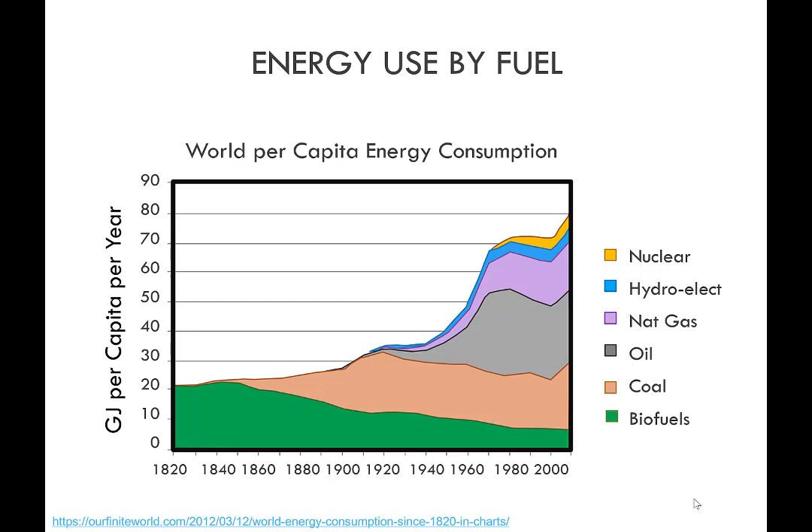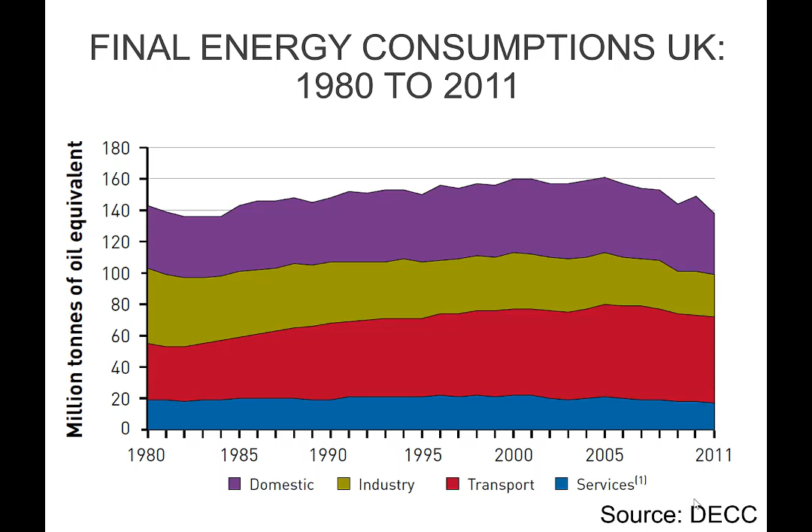Anything, guys, you want to add? Anybody have any point relevant to what we have?